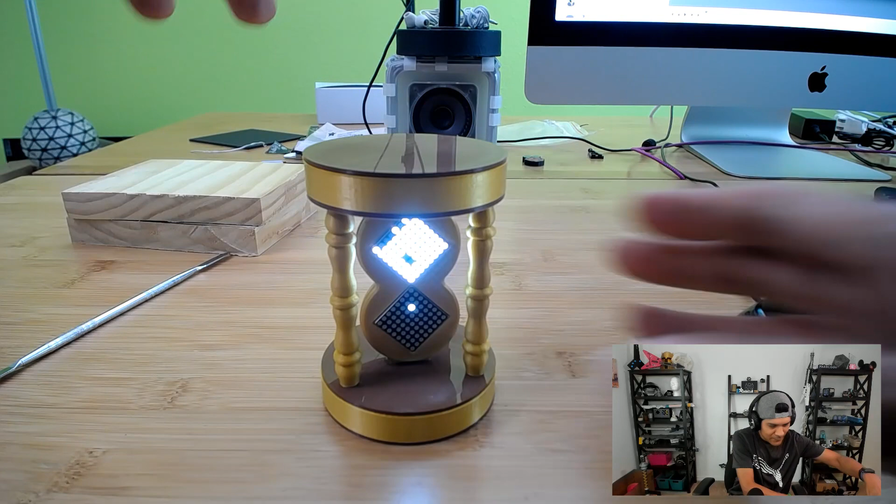In today's tutorial, we're going to take a look at the LED matrix project. This is a really fun one that I put together, and in this tutorial I just wanted to cover how I put together the snap fits. So this features a top and a bottom case, and they're very similar, and they have snap fits.

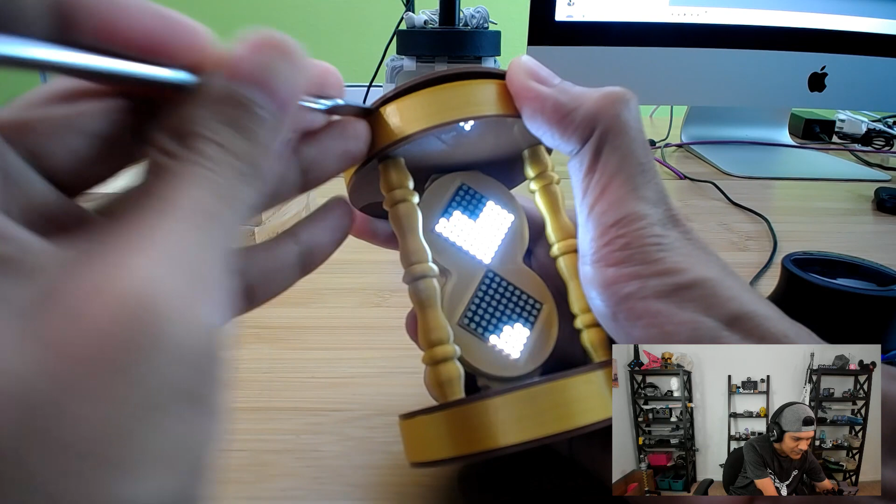So what I'll do is I'll use my spudger tool to pry this open so you guys can take a look inside of it. I usually use my fingernails, but they're a little short this week, so I used that spudger tool, I popped it open, and let's take a look at the top cover.

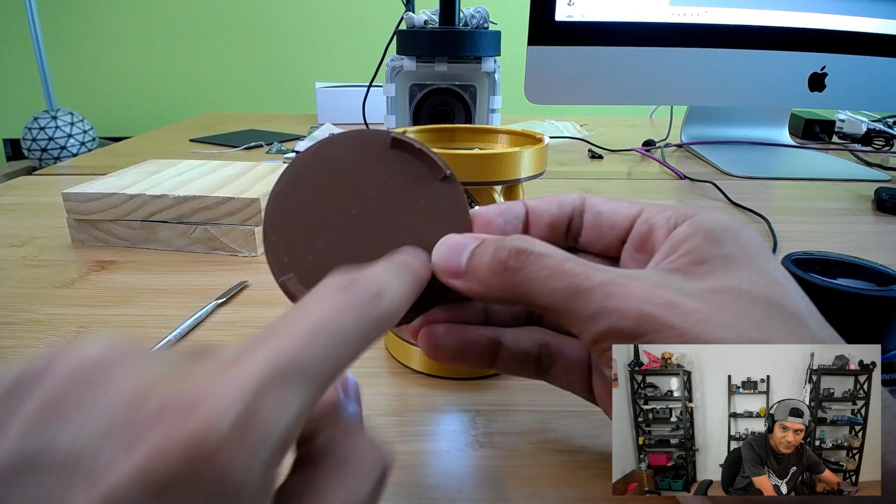The top cover features these two snaps here. They are circular, and they kind of have that little Pac-Man looking shape to them. And on the inside here, you can see that the frame is fairly simple. Let's go ahead and pop this out as well.

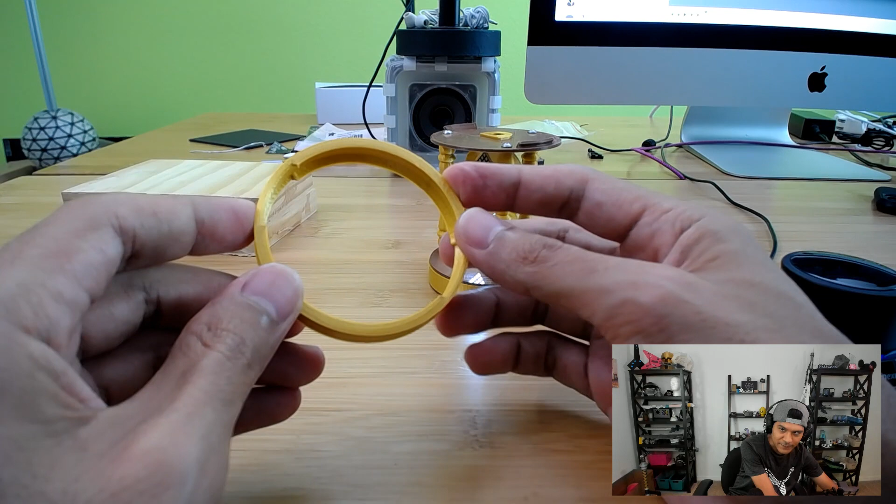So this is a symmetrical design. It has nubs here on this surface, and then nubs on the opposite surface, and they're just mirrored from top to bottom, and then also mirrored from the left to the right.

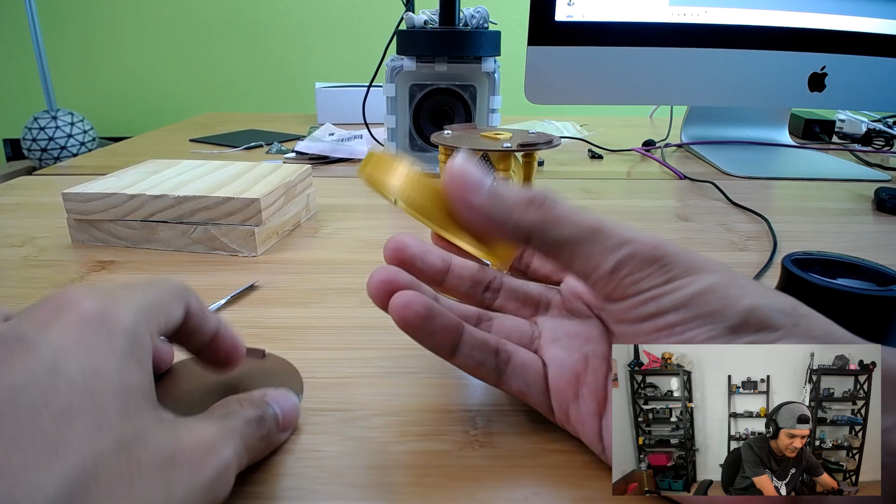There's some extra sweep geometry here. This is what actually keeps the covers and the snaps fixed in place.

Normally, if you were to create a snap fit circular case and not have these sort of end stops, then what you'll have is this thing that can kind of unlock itself by twisting it, and then it would open. That could be interesting if you want that feature, but in this case, I did not want that feature. So you can see here on the inside, this sweep keeps that snap with those edges locked in place, so it cannot freely spin now in there.

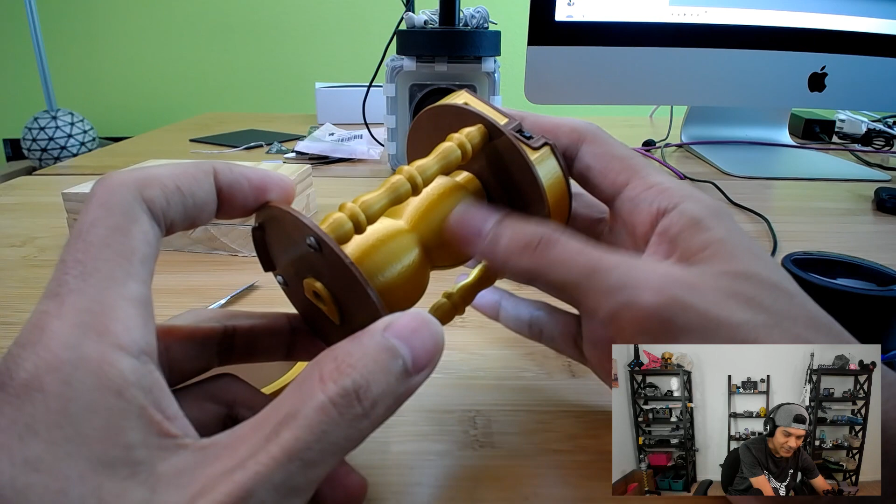And then the bottom cover for this case has some holes here for securing the spindles to the cover, and then it has this sort of registration key here for this peanut-shaped enclosure for the matrices. So that's how that's working.

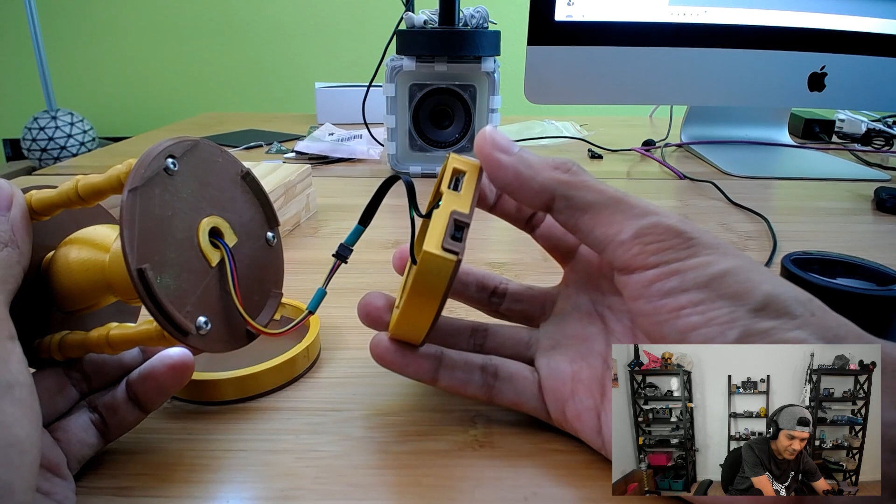And then on the inside here, a very similar type of feature, just a little bit different. This case has like a flat edge that allows the USB port to have a hole there, and a little holder for the slide switch. So that's how that's working.

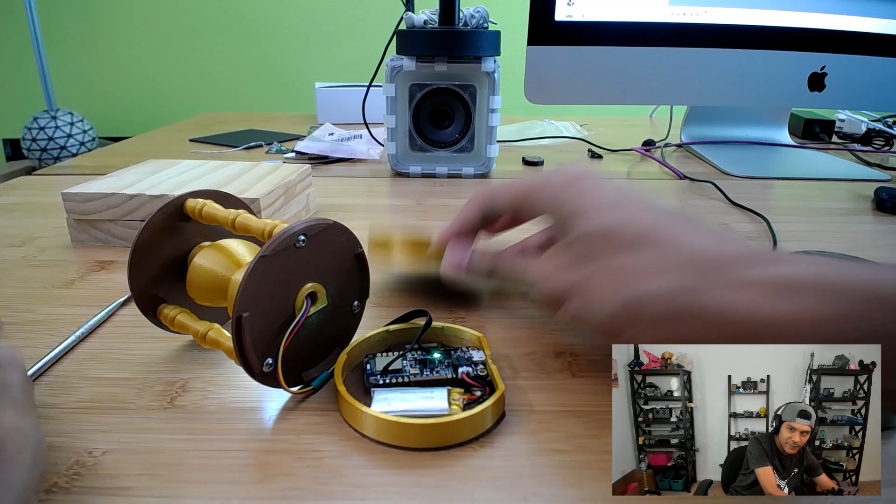All right, so we're just going to create this really simple case here, and show you guys how I create the sweeps there.

All right, so let's jump into Fusion 360 and create a new document real quick.

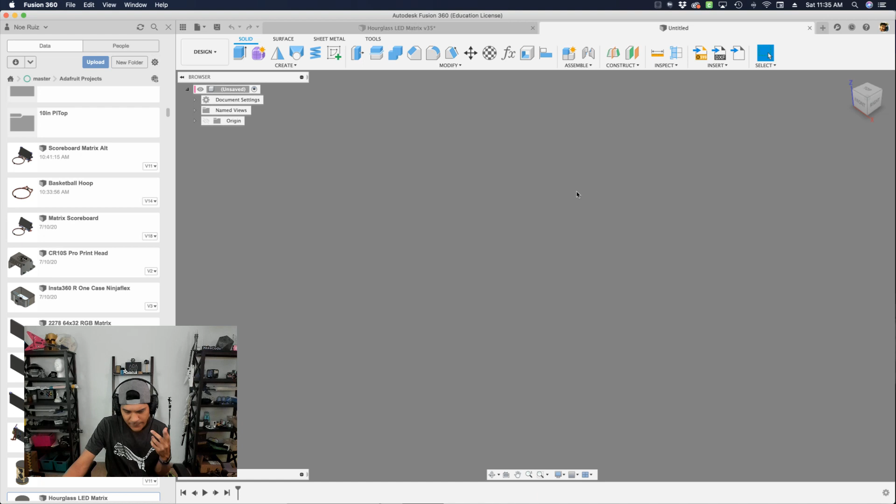All right, so the first thing I like to do is just create a new component. You can do that several different ways, you can even do it in the shortcuts window, you just say new, and new component shows up. The first thing I'll call it is enclosure, it will house all of the stuff that pertains to the enclosure. I have a hotkey set up for that, for the new component, so I'll just type that in. It's the letter N on my keyboard, but I set that one up customly.

All right, so we're going to name this one the bottom cover. Okay, I'll make a new component, I'll name this one case. I'm going to be careful here, see where it says parent - if I hit OK, it's going to make it inside the bottom cover, but I don't want that. I want it to make it inside the enclosure.

So I'll hit X on that, and then this is selected, and I'll select the enclosure as the parent. I'll hit OK, so that way it stays within that enclosure. I'll create another one, and this one will be the top cover. And then again, I'll deselect the parent and then select the enclosure as the parent and hit OK.

All right, so that's cool. Now I got my three things set up here, and I can start working away with the user parameters. Let's open up our user parameter window and start typing in some stuff. I'm going to have a thickness, of course. I like to make mine 1.5 millimeters. I like to have a gap, which is the clearance between surfaces that are going to be touching. That is normally 0.2, but we can adjust that later.

Let's go ahead and create a case diameter. Let's make this 60 for now. Again, we can change that later. Let's have the case height as well. Let's make this 15 millimeters. Why not? We can change it later. So I got the case height, the diameter, a gap, and a thickness.

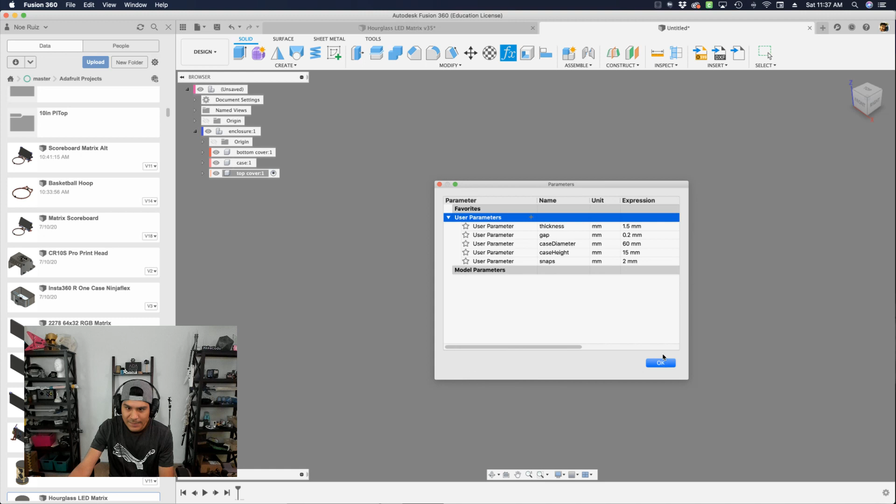One last one is the snaps, and I want my snaps to be 2 millimeters in length, or maybe it's tallness. We'll change it if we need to. So those are the standard parameters that I like to create before designing, because I tend to use those over and over again. All right, I'm gonna create the first sketch in my bottom cover.

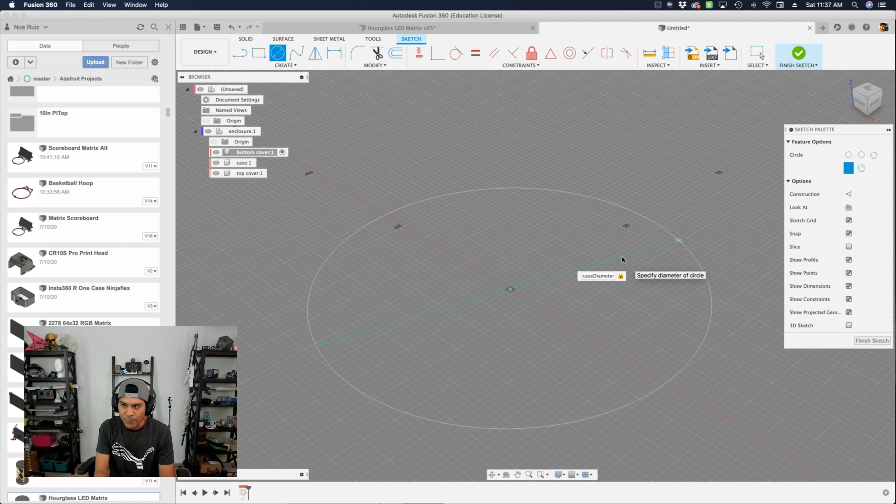So let me go ahead and activate that, create a new sketch. I'm gonna sketch here on the bottom floor plane. This is all gonna be driven from the center origin. So let's start from the center and then draw it outwards. Go ahead and type in our case diameter word and hit enter, and there it is. I'll select that, hit E on my keyboard to extrude, and instead of putting a number, I'm gonna say that's gonna be the thickness. Hit OK.

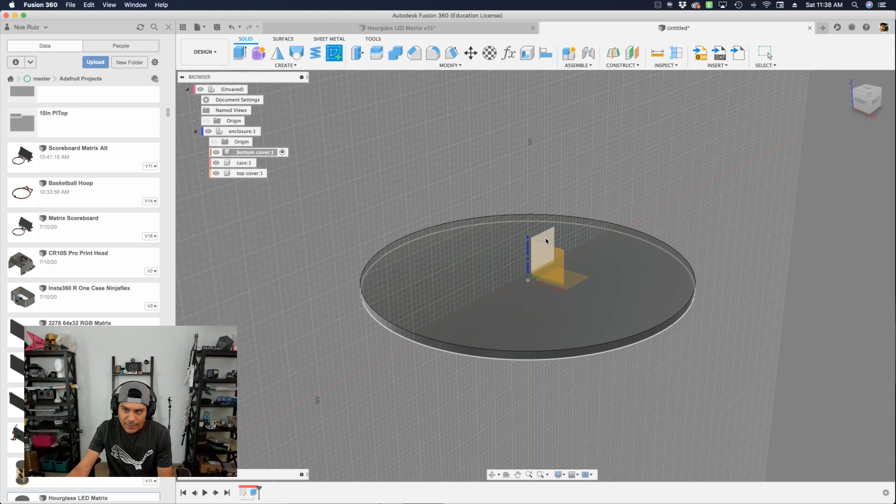That's pretty much all I need to do for this. Actually, no. Let's go ahead and start creating the snaps. I'm going to create a new sketch, and it's going to be on one of these side profiles, whichever way you'd like to. You might want to look at your view cube, like is this the front? Do I want mine to be in the back? I'm going to make it on the left and the right side, so I'll start from there.

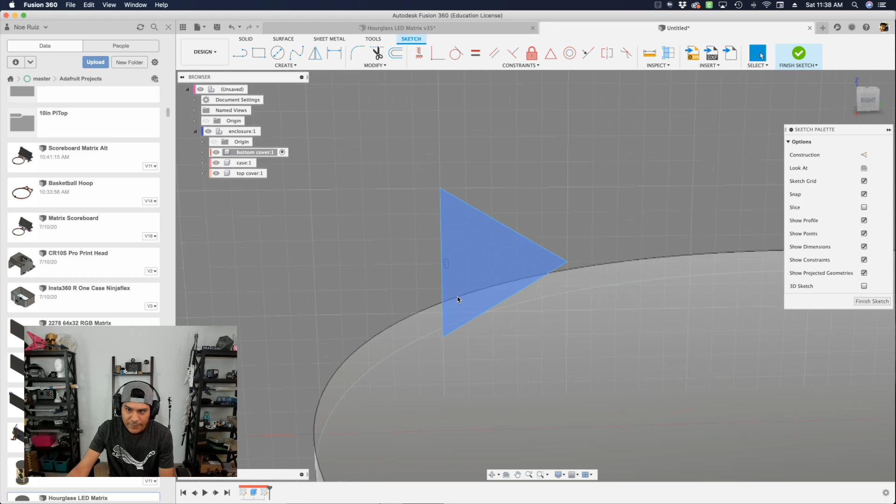Let's zoom in here and start sketching out our triangle. So let's go ahead and make a triangle. It's going to look like this. All right. And then we're going to start straightening it out. So this edge here already gave me a sketch constraint, which is horizontally and vertically constrained. And then I will create a sketch dimension, a degree, saying I want a certain degree from these two edges here. Let's round this off to 45.

And then we can select these 2 edges here and then set a perpendicular constraint to that. That way it is a nice 90-degree thing here. The last thing I'll do here is give this line a sketch dimension value of the snaps, and that's going to be 2 millimeters because we set that up. Now I have this triangle that I can move around, which is nice.

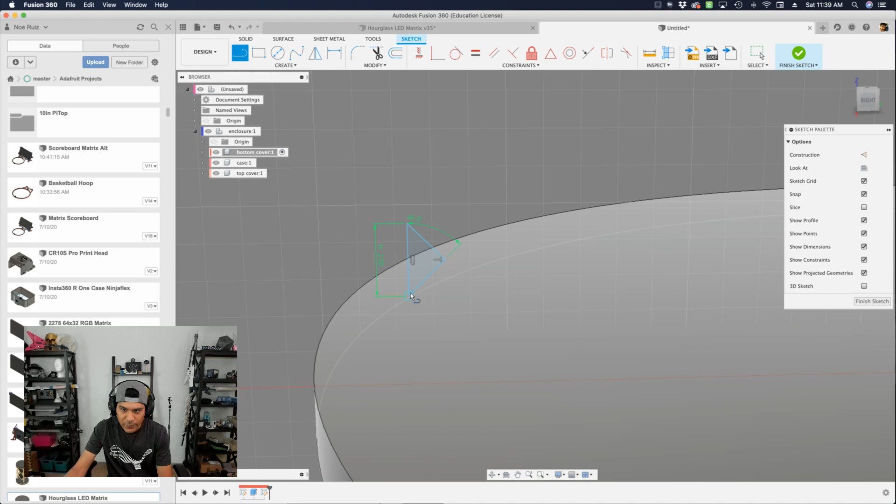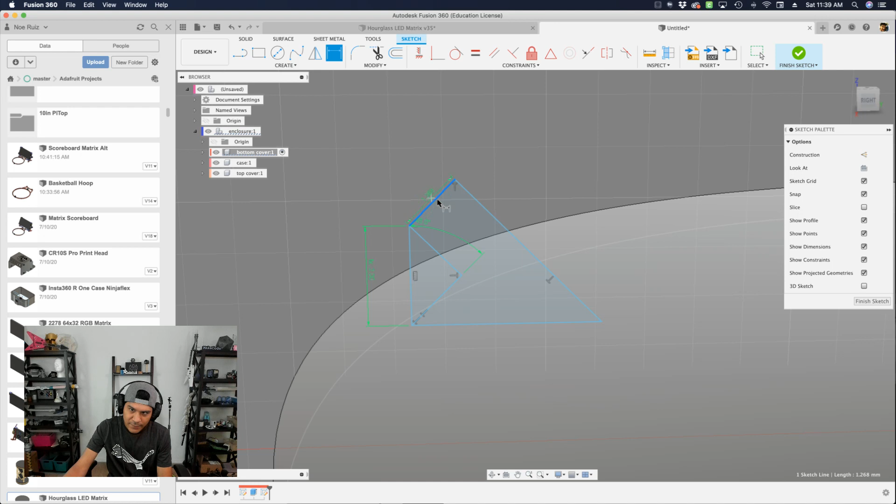Now to create the rest of the shapes, it's going to look like this. We're going to make a straight line that goes across, and then a line that goes up this way, and then one that goes back down connecting to one of these points here. So to straighten this out, I'll select these 2 lines and create a perpendicular constraint there. And then all I need to do here is give this edge here, this line, a value of the thickness, and that's 1.5.

Okay. So from here, now we can kind of move this whole set of lines that creates our snap fit shape. And I need to start adding some sketch dimensions to it. So starting from the center, I'll create a sketch dimension, hit D on my keyboard, and then select this bottom line here. And I just need this 2.5. I need to change that to the thickness. And hit OK. So now if we look at it straight on, you'll see there it is right there on that thickness.

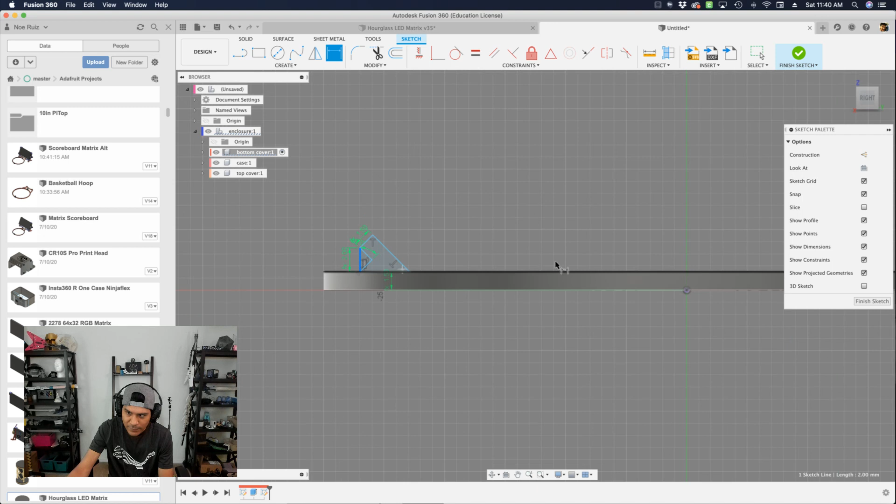And then what we can do is you can grab this line and say, I want this line to be a certain distance away from the center. And this is going to be our radius of our diameter. So we'll take our diameter, divide that by 2, and then we need to subtract the thickness from that.

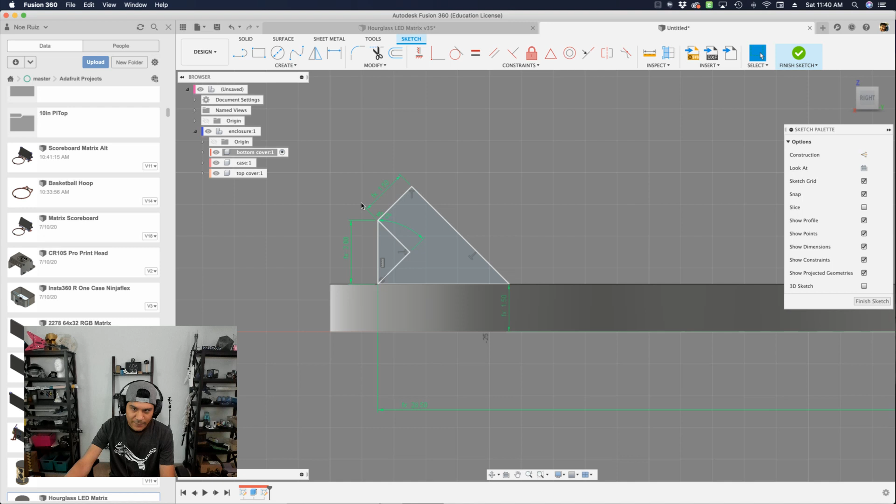And we're doing that because when I create the case, I'm going to make an offset that will create the wall. So that's why I have this little bit of extra gap here. So I'm subtracting the thickness, the wall thickness really, from that. So now that that is set up, I can now hit Finish Sketch.

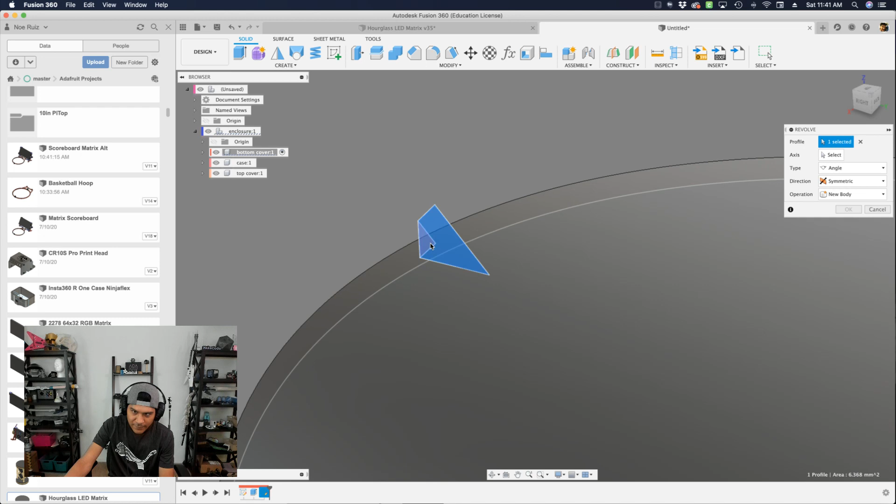And the way we're going to curve this around is with the Revolve tool. So I'm going to hit Revolve, and our profile will be just this thing here. Not the inside, but just this shape here. The axis will be our blue line here, which is the Z-axis. And I will change the direction from one-sided to symmetric.

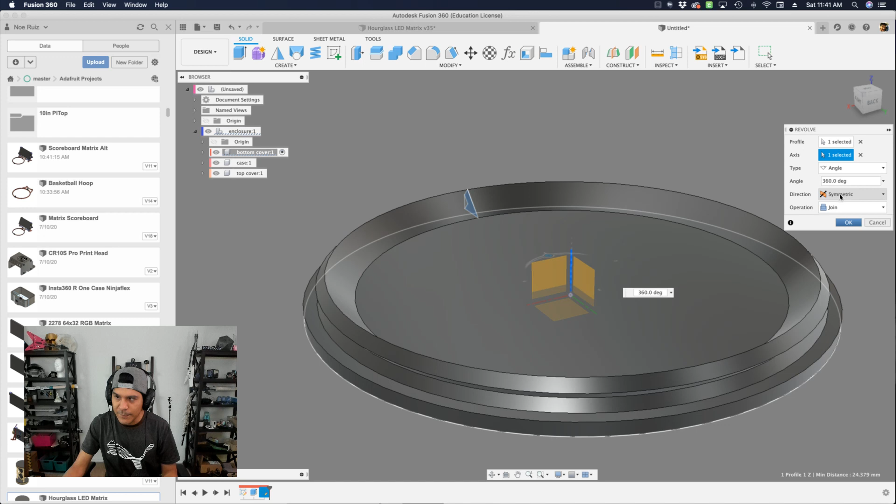And normally this would be like 360 degrees, which is going all the way around. You could do that for your case if you'd like, but you would have a free spinning top cover, or at least it would be able to be free spinning. You might not want that, so in this case I'm making it 30 degrees.

And again, I have that direction set to symmetric, because if it was one-sided, it's only going to go one side, which makes sense. The operation is set to join, so that it merges with that body. Hit OK. All right, so that is our first snap bit. And what I'll do is I kind of want this one to be mirrored to this side.

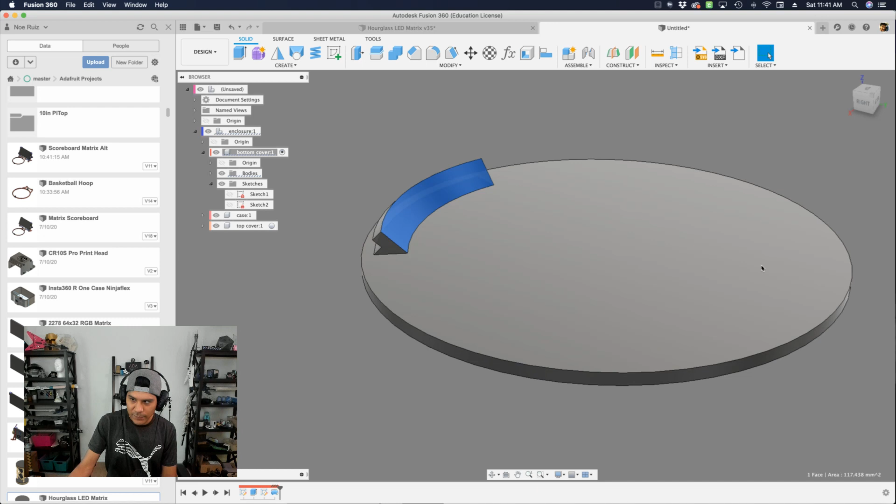So we'll just bring up our mirror command and change the pattern type to features and select our revolve from the timeline. Our mirror plane will be the plane that makes sense. In this case, it's this one right here. You get a little preview there before you hit OK. Hit OK, and there is our bottom. All right, that's our first thing.

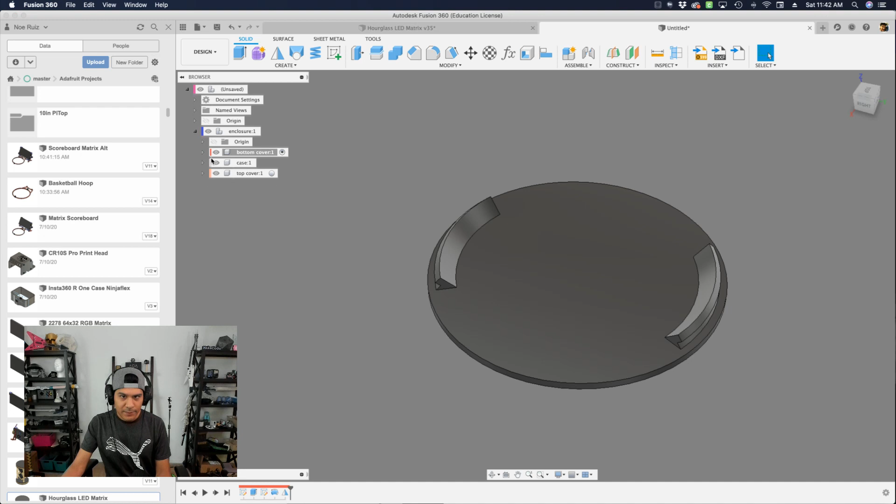Let's go ahead and create our case. So activate that component. And what I'll do is I'll create an offset plane starting from the bottom here, and then going up. Instead of a number, I'll just type in thickness, because that's the value that we want, is to be our thickness. I'll select that construction plane and start sketching right on there.

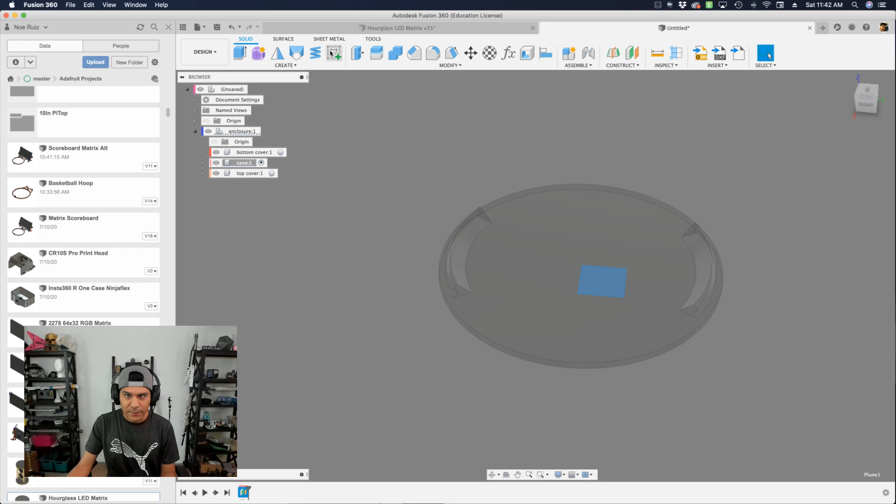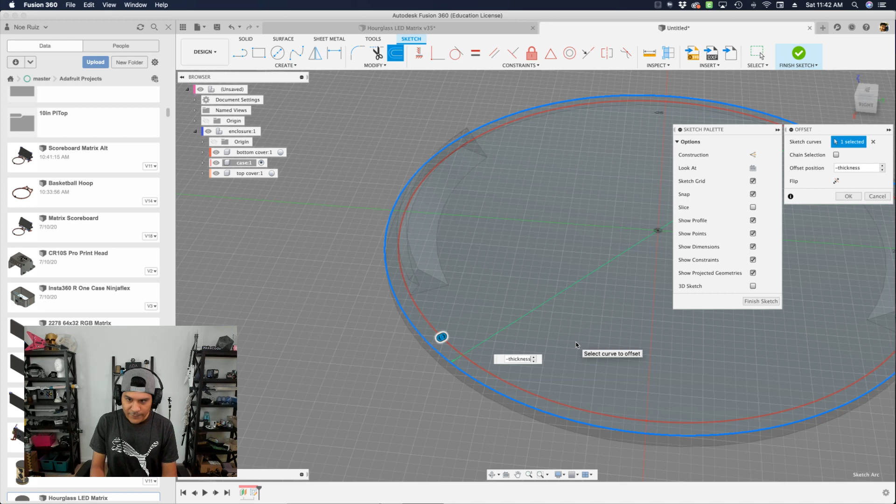Again, from the center, we'll create our circle. Let's call this the diameter. And then what I'll do is select that circle and then hit O for offset. And I want the offset to go inward, so that is a negative value. And I want it to be the thickness, of course, so I can say negative thickness, and that will give me that 1.5 millimeter value, and hit OK. All right, so now I'll finish sketch.

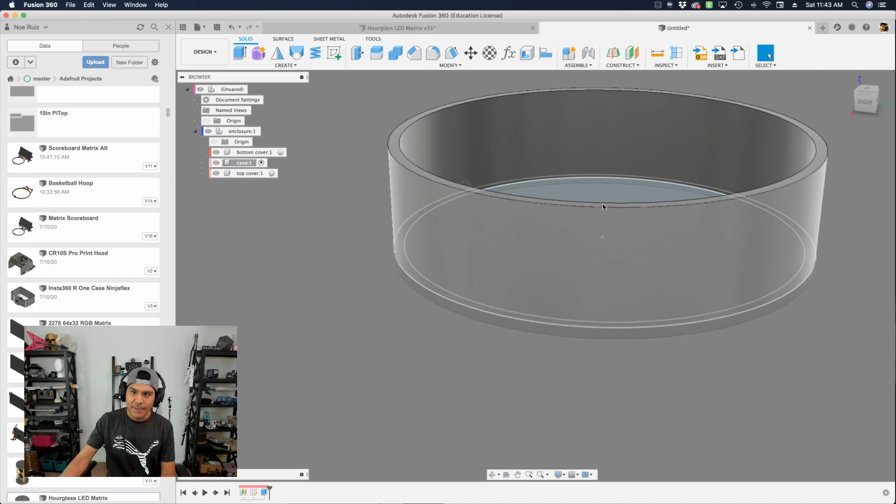I'll select just that sliver of our wall thickness, and I'll hit extrude. I'll start to bring this up, but instead of using a real fixed number, I'll go ahead and type in height, because we did set that up already. So the height is set to 15 millimeters, and OK. I can hide the sketch for a second there just to kind of get a look at it.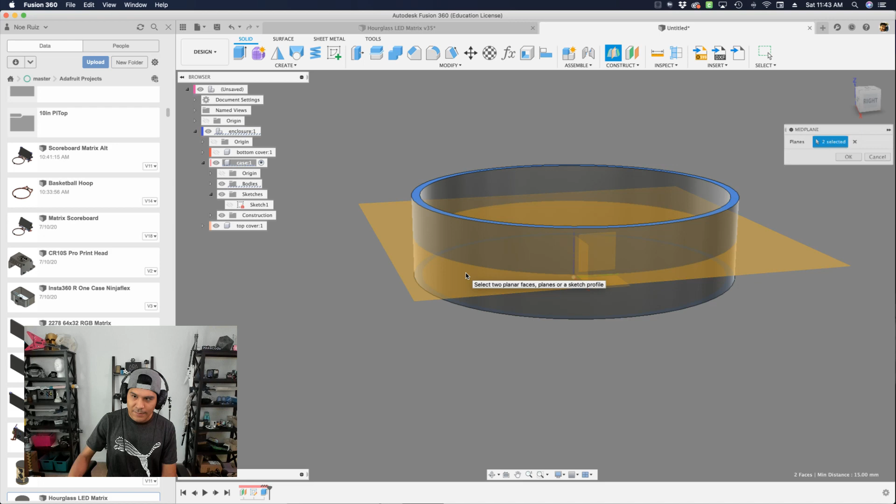All right, the next thing I'll do is I'll use the mid plane tool to create a mid plane between the top surface of our case, let me hide the bottom cover, and the bottom surface of our case. And Fusion will just figure out what the center of that is. So there it is, and it'll always update whenever we update our height value, our user parameter. Sweet, and that'll help us create a mirror in a few moments as well.

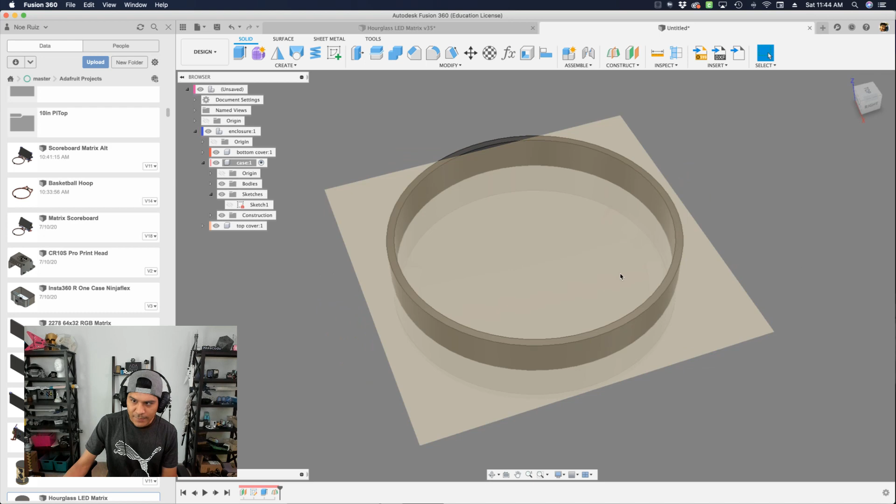So with the case selected, we need to create our nubs, and the nubs should have the same orientation of our snaps there that we created. Let me just go ahead and hide that real quick. And so that means we're going to create it on this plane, and then we can come in here and start to create our triangle shape. So let me hide the bodies for a second. The triangle shape is going to be inward, so we'll have a straight line, and the point will come out this way and then connect back again.

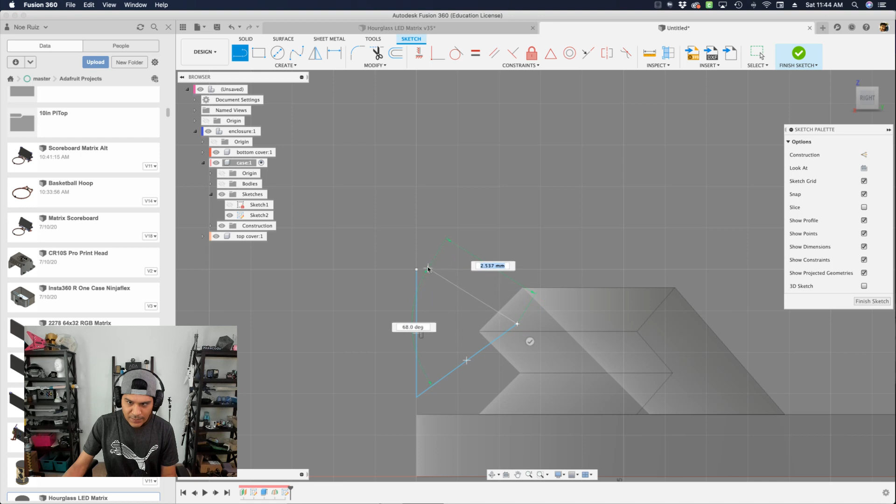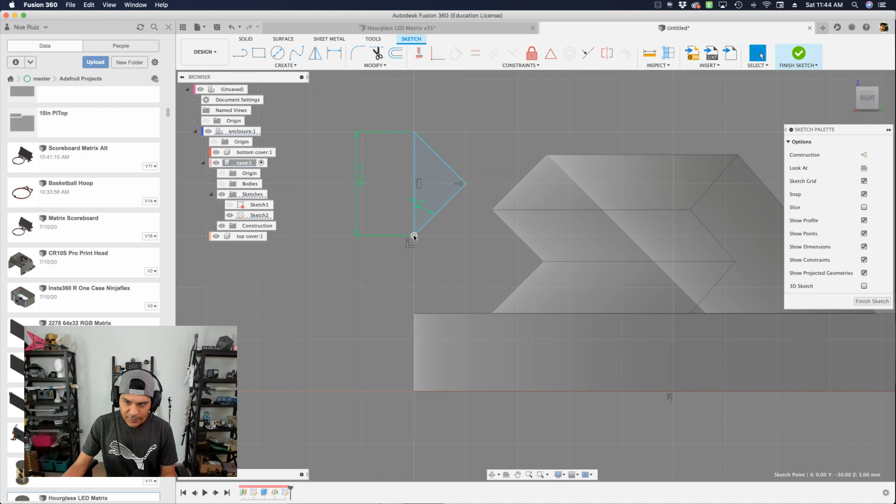All right, so we already have our vertically set constraint there, so I'll just apply a dimension here for snaps. I'll create our degrees here, which need to be 45, and then I'll grab these two lines and make them perpendicular. Cool. Next thing is let's grab this vertice here, and I say I want a certain distance away from the center right here, going up and down.

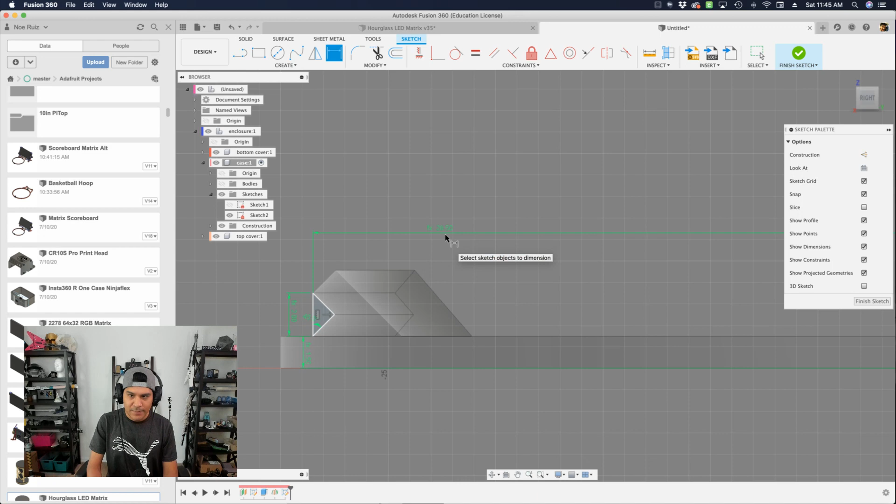Let's make this the thickness. And then this line needs to be a certain distance away from the center again. This will be our diameter divided by 2 minus the thickness. And that sets it right in there where it needs to be. We'll add the gap a little bit later. So with that there, let me bring back my body and hide our bottom cover. Look on the inside there.

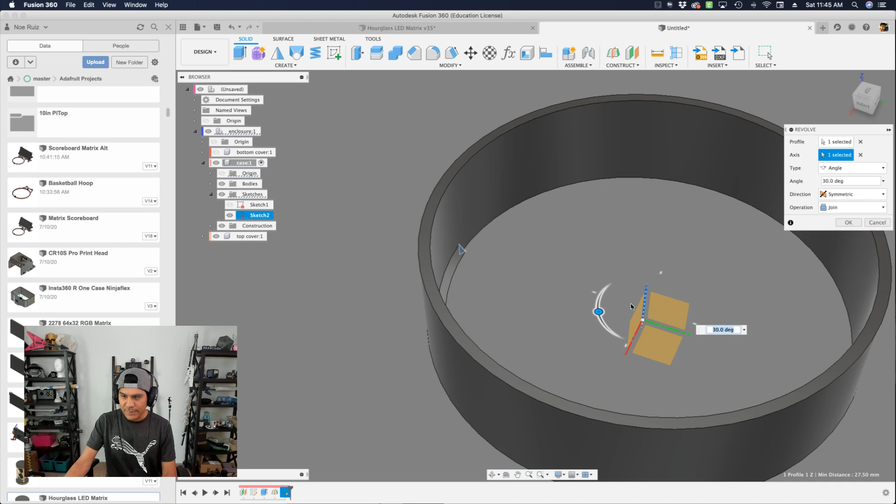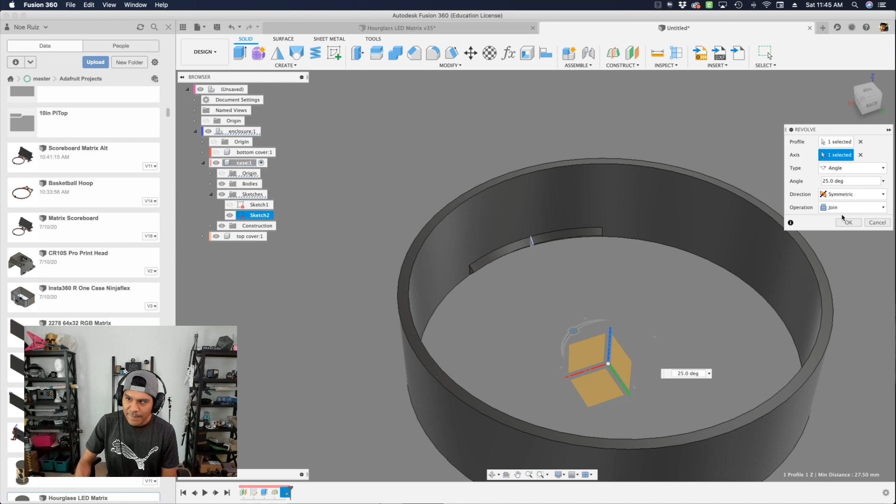We're going to use the same thing, a revolve, and we'll revolve that profile on this axis, which is our blue line. And then I'll change the, there's a little bit of a bug here. It's the direction set to symmetric, but it's not showing me that. So I'm going to switch it back to one-sided and then switch it back to symmetric. And then Fusion remembers that that is what it should do. All right. Our degree should be about the same. So let me set that to 25 and operation set to join.

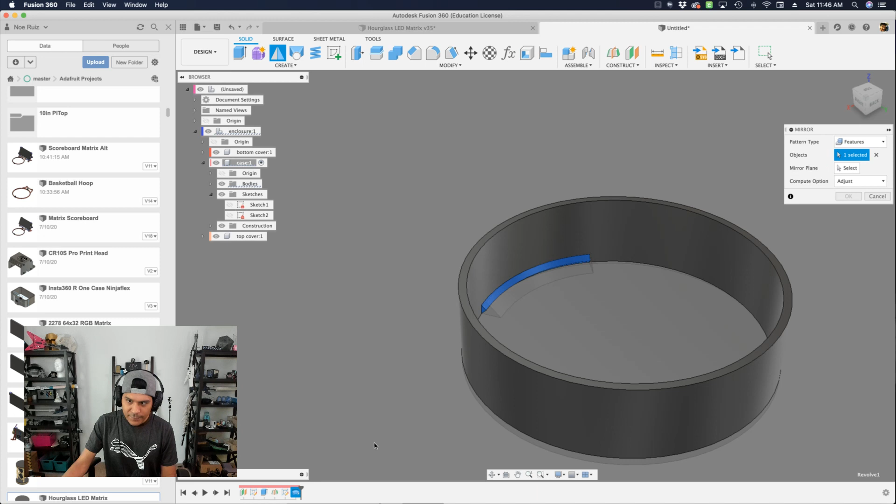So I'll hit OK. With that there, I could bring back the bottom cover just to get a look at it and see that, yeah, that looks like it is indeed the same degree. Cool. The next thing is to create a mirror. So I'll hit mirror, and I'll mirror that revolve. And then our mirror plane will be this construction plane there that got made. That's sort of built into the component. All right, so hit OK. And then we have those two nubs in there. Let me hide the bottom cover so I can see. And there we go. There is one over there and one over here.

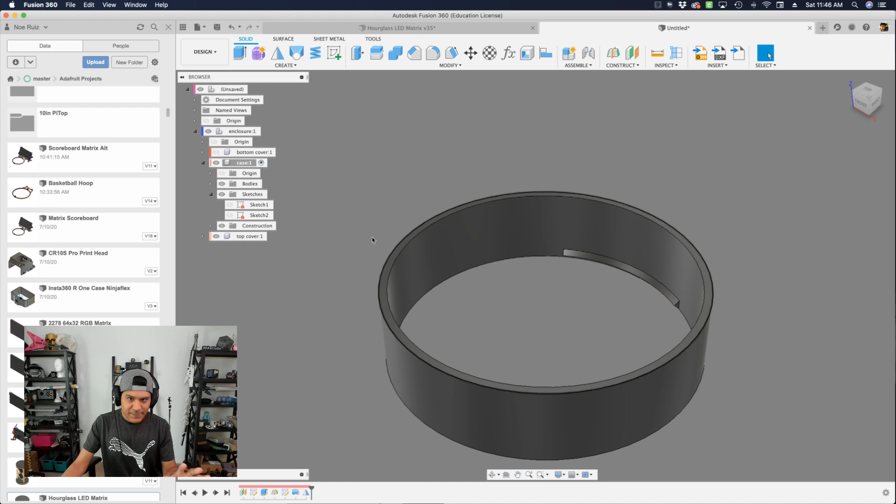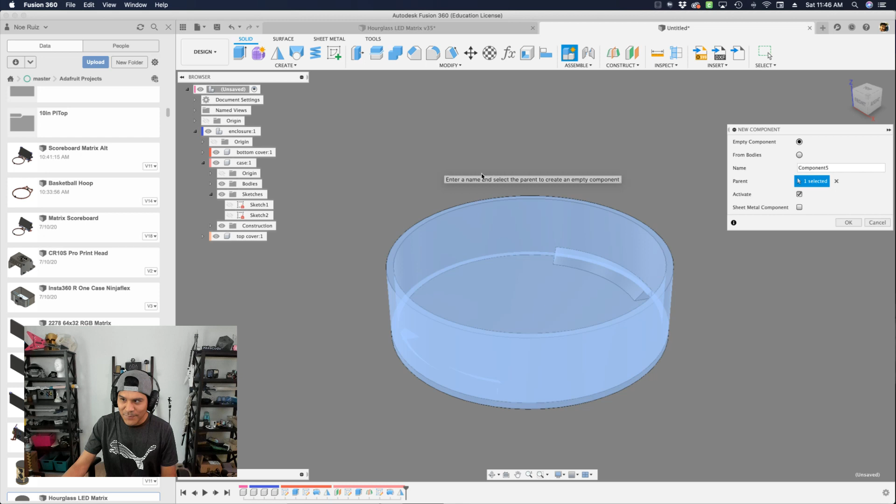Excellent. Now the next thing we need to create is the geometry that's going to stop the cover from twisting open. So let me start doing some things here. I think I could just do S key to bring up the shortcuts and just say color cycling toggle. I'm going to turn that on. And sometimes it gives you decent colors. This time it didn't. I don't like the colors. So I'm going to turn that off and bring up my appearance window and then just assign some colors to these things because they just help me visualize it a little bit better. You can even edit the color to bring it up so you can see a little bit more of the detail. And that way I can kind of get in there.

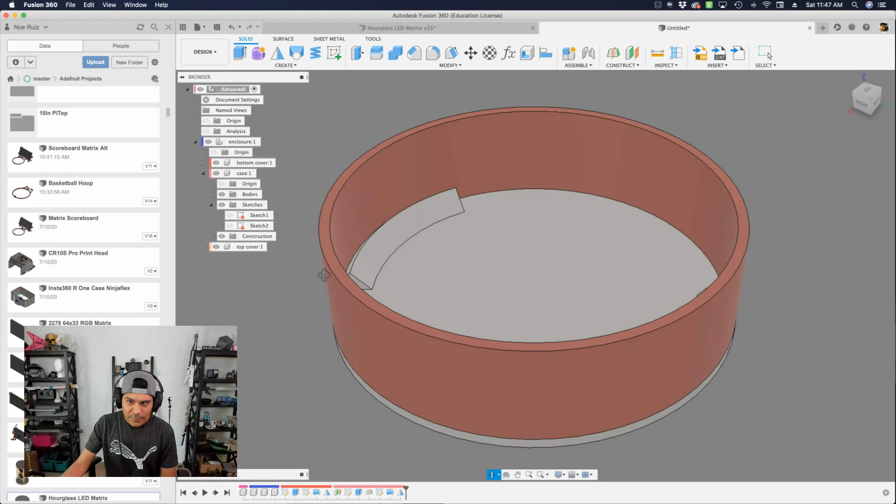Another thing I'll do is I'll use the section analysis to get a sliced view of the half mark there, so I can see the inside of our mating surfaces there. So that's cool. All right, the next thing you need to do is create that geometry that's going to stop this guy from twisting open. So if I were to actually print this out, and you can see here that as I twist it open, this could be something that you want as a feature, but it's hard to tell whether inside the case it twisted open or not.

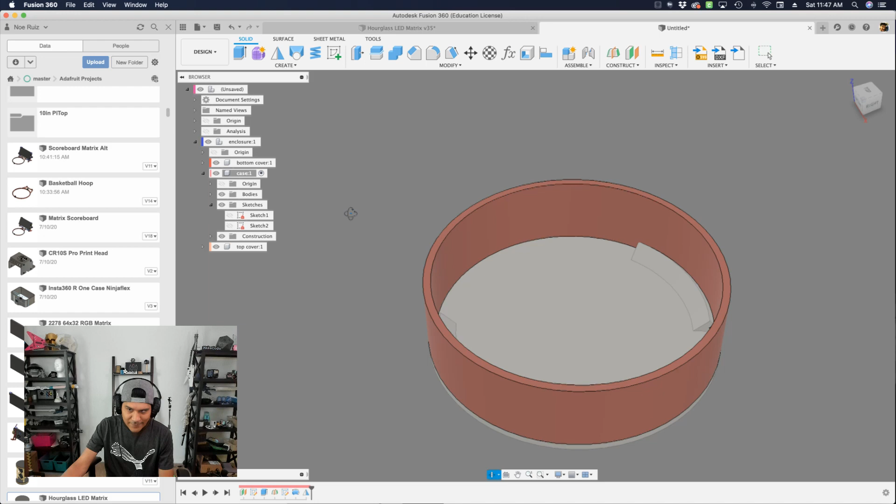So if you want to do that, you can, but in this case I want to have it not twist open. So I will create some new sketches just to create sort of a geometry that's going to stop that from happening. So I'm going to draw it and make sure that I'm in the right component, which is case. That's where it's going to go. I'll create a new sketch, and it's going to be on the opposite end here. So looking at this surface here, that's going to be on the front and the back.

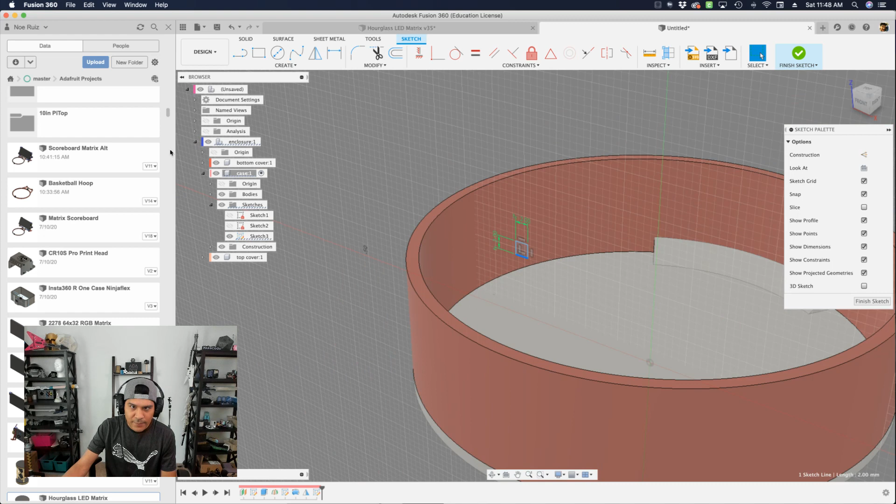So here, all it's going to be is a rectangle with the snaps value. So that's going to be 2 by 2 millimeters. And then I just need to assign some sketch dimensions to it. So I can say for this surface to the bottom here is going to be the thickness. And then from this line to the center will be our diameter divided by 2 minus the thickness. And there is that. Hit finish sketch.

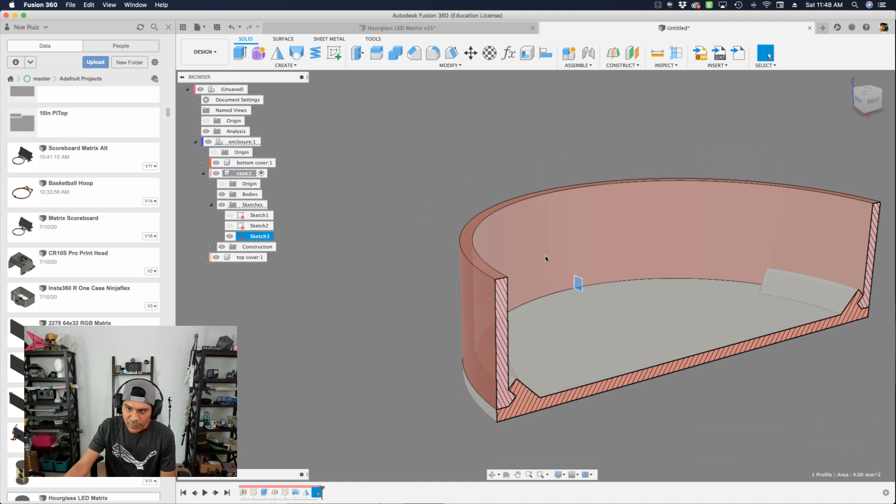Now that that is placed where we want it to be and drawn, I can create a sweep. We're using a sweep because we don't actually want to revolve around the thing. We just want to sweep along a certain edge here. So hit sweep. And then what we'll do is we'll hide the bottom cover and hide the analysis for a second. And the path is going to be this line here.

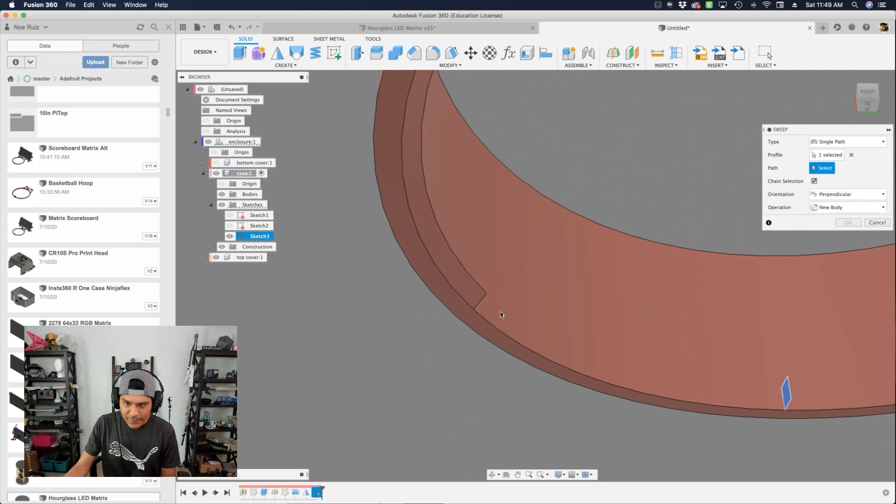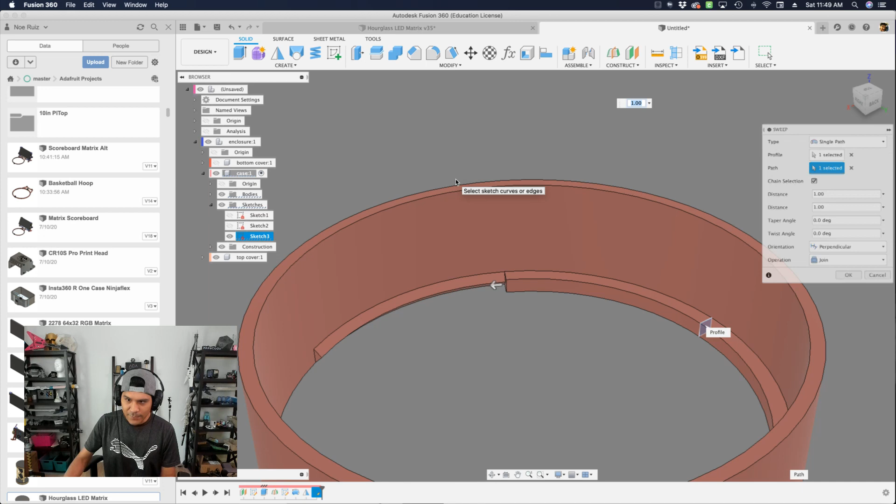Now you see if I roll over it, the path is only the line that starts from this edge to the other edge there. So that is about all I want to do, is to select it, and you get a nice preview of it. You can see what it's doing here. It's just creating some geometry that will stop our snap fit piece from actually coming off and twisting out. So that's why we're adding this. So I'll hit OK.

Now this is added, I just need to mirror that to the other side. That's simple enough. We'll bring up the mirror command and the pattern type set to feature. I'll select that sweep from the timeline, and then our mirror plane will be the one that makes sense here, this one here. Hit OK. And there, that looks good.

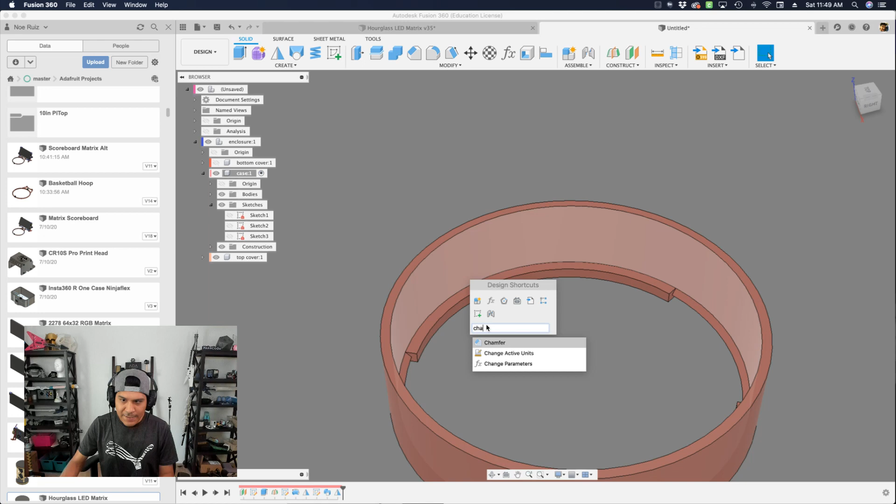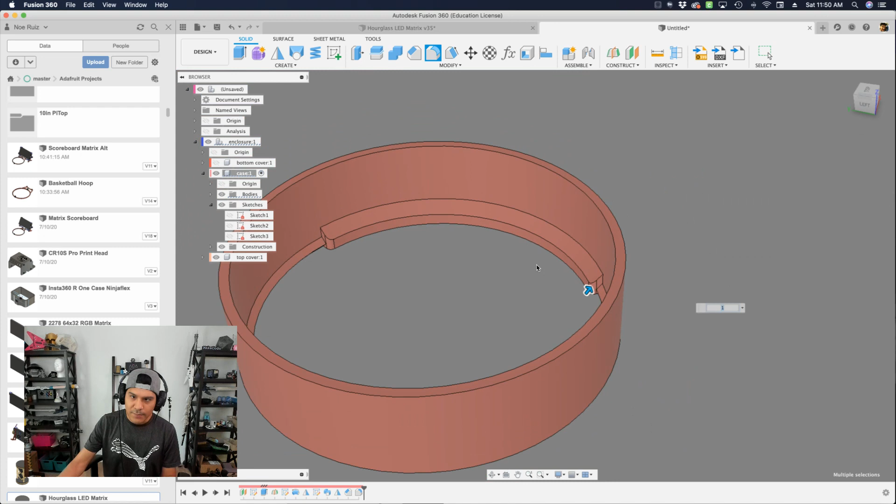Now there's some other things that we can do. I can add a chamfer to this edge here. Let's make it 2 millimeters, rotate around, select the same edge on the opposite end, hit OK on that. That looks good. Another thing I could do is add some fillets to these edges so they're not so rough and pointy. So I'll select those two there, rotate around and select the other two, giving me a total of 4 edges. There we go, hit OK. So that is really nice there.

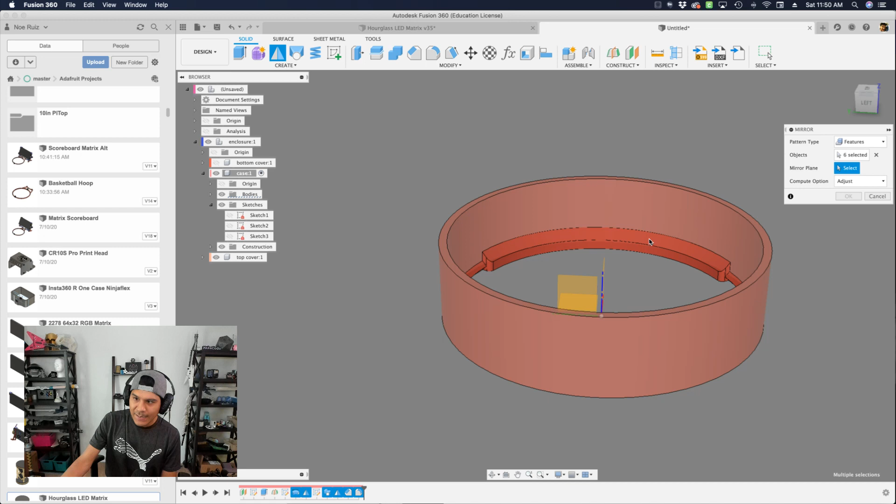Cool. I need to mirror this whole set of stuff to the top because we're going to have a top and a bottom. So it's really this one, these, all of that right there, starting with the revolve all the way down to the fillet. With all those selected in my timeline, I can just say mirror. And then Fusion says, oh, there are 6 selected. My mirror plane will be none of these guys because these are default.

Remember that one that we created that was the midpoint? Well, we're going to use that one, which is right here. So select that, hit OK, and there it is. Let me go ahead and hide that construction plane since we are done with it. So now we have a mirrored thing.

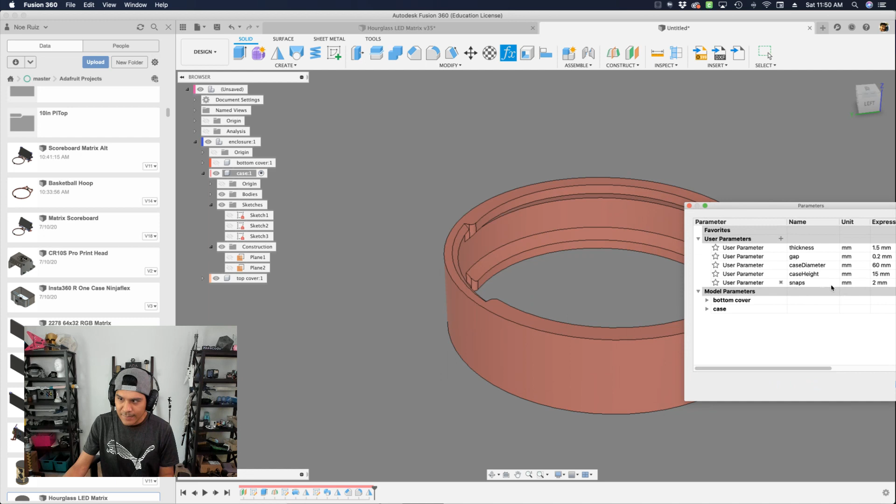And what's really nice is if we wanted to change the height, make it a little bit taller, say 20 millimeters, it's going to change perfectly with us. Let's drop it down to 10, make it even smaller, and that looks okay. Let's bring back the bottom cover and take a look at that. That looks okay.

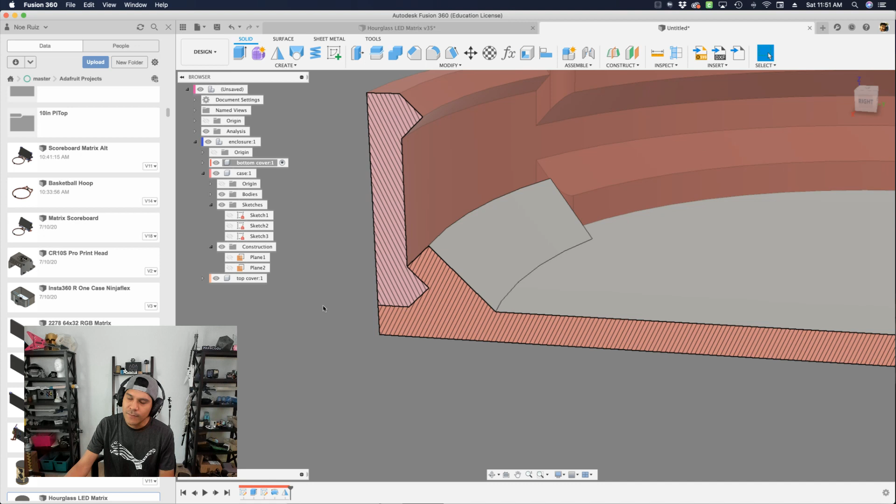Now that we've kind of created this, let me go back into the bottom cover and start applying those offsets. So I need to create some offsets to give us some gap, because if we look at our section analysis, you can see that there's no gap. And if we printed this out, it'd be way too tight. It probably wouldn't fit. So what we'll do is we'll create a press pull of these surfaces, this one and this one. We want to bring these inward. And instead of having a fixed value, I'm just going to type in gap because we already set that up in our user parameters. And it's 0.2 millimeters. So hit OK on the gap.

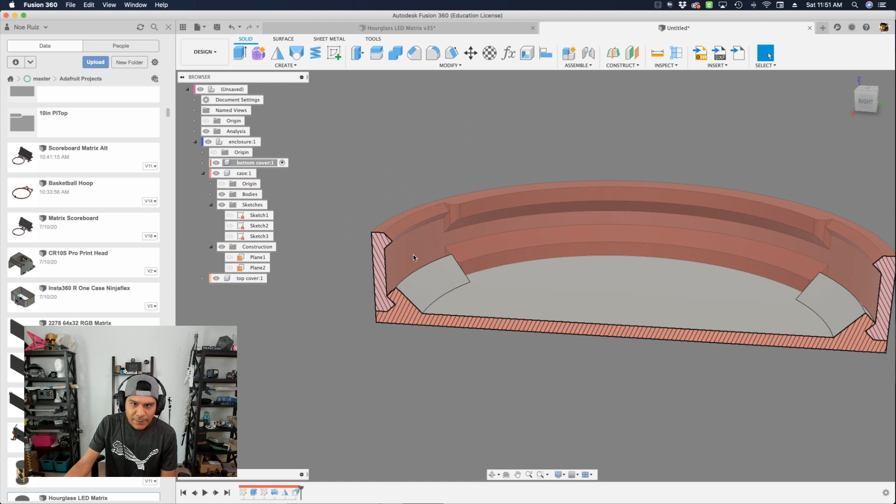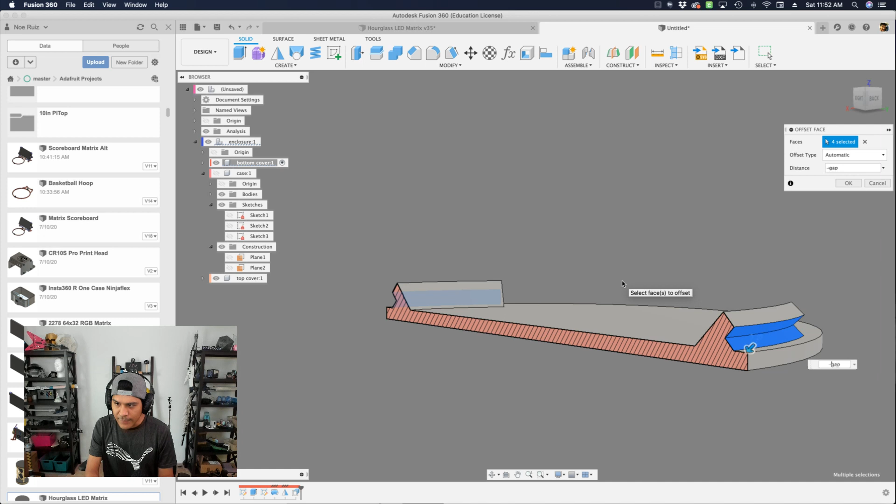And now I need to hide my case so I can get to the other surfaces. I'm going to use a press pull again, but this time on these surfaces. Let's get that one, revolve around and select the opposite ones here. All right, now instead of adding a value, I will just type in gap, but it needs to go on the inside. So I'm going to say negative gap, and that'll push it on the inside.

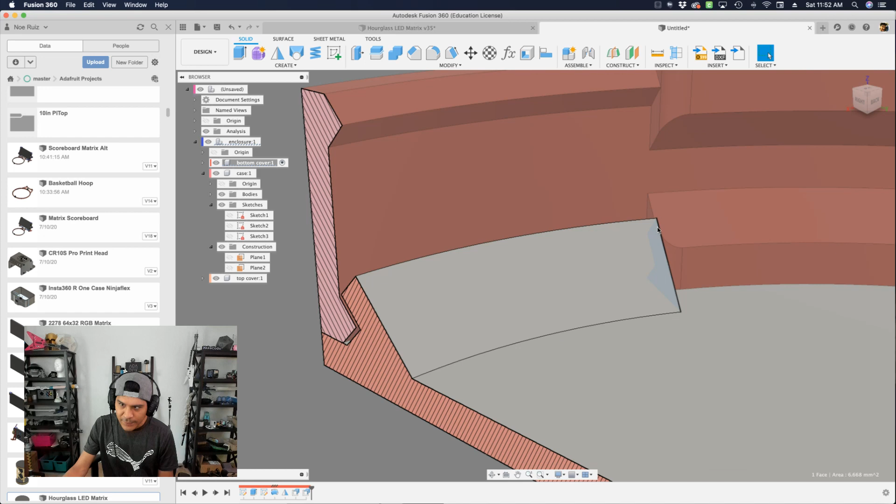Excellent. So now with that, I can bring back the case and take a look on the inside. Yeah, there's definitely a 0.2 millimeter distance between those surfaces. And that's what we want because we're 3D printing it. Another gap that you want to do is this surface right here, because you can see here that this surface and this surface over here are just touching. There's no gap between them. So let's go ahead and add that gap between them.

And turn off section analysis for a second. So again, a press and pull is just fine. I'll select this edge, surface, this other surface.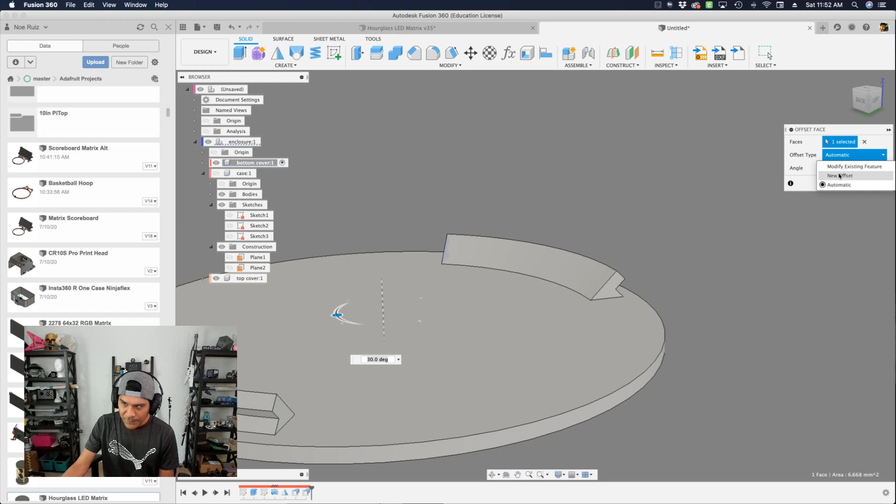Instead of automatic, sometimes that happens. I'll create new offset, and then I can select all these multiple surfaces like that. Did I call them surfaces? I meant to say faces. And negative gap, because we need them to go on the inside. So you can see here, as I hold down the command key, I can see a preview of what the effect is being done. I'll hit OK.

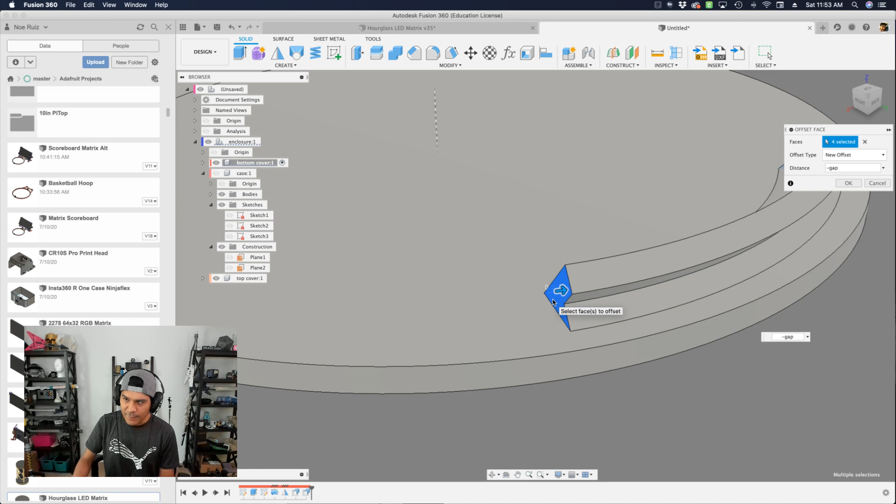Now if I bring back the case, we should have some gap all the way around. Looking at it straight from the top, we can look down into there, and yep, there is a slight gap that we want. Excellent.

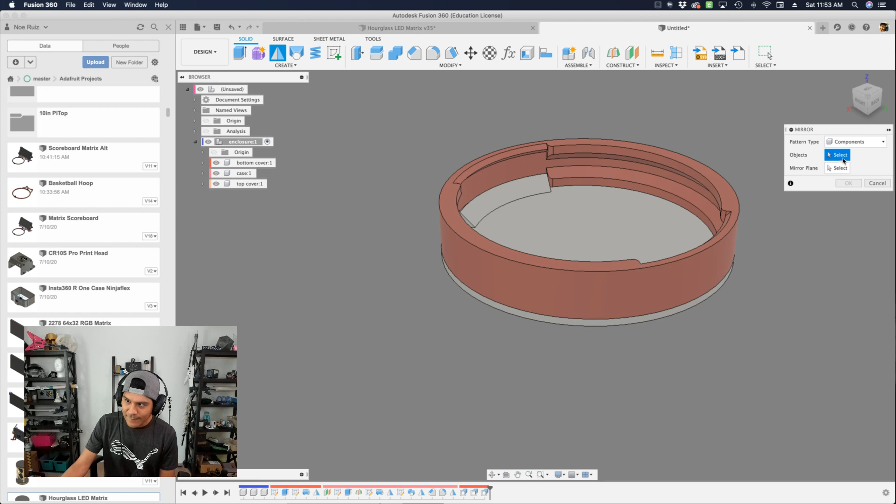Well, at this point, we could redraw the bottom cover, but if really this was to be a simple case as is, I can just mirror that entire component. So I say mirror, change the pattern type from features to components. This will be the thing that we're mirroring, is the bottom cover. And then our plane, well, it's going to have to be that midpoint

construction plane that I think is hiding inside the case. Yes, it is. So let's select that and hit OK. And then hide the construction plane again. So there it is. There's our top and our bottom.

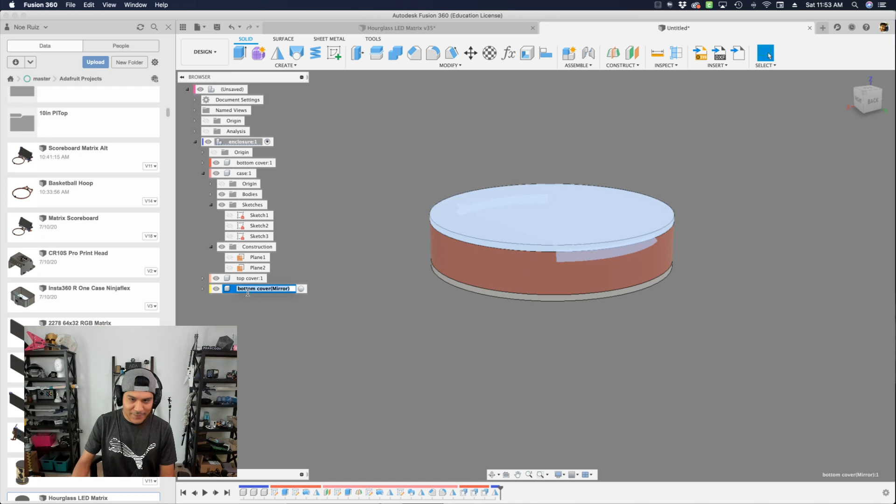We can even call it top cover mirrored, because I did create that thinking that we were going to make it, but let's go ahead and delete it and say, no, we don't need that.

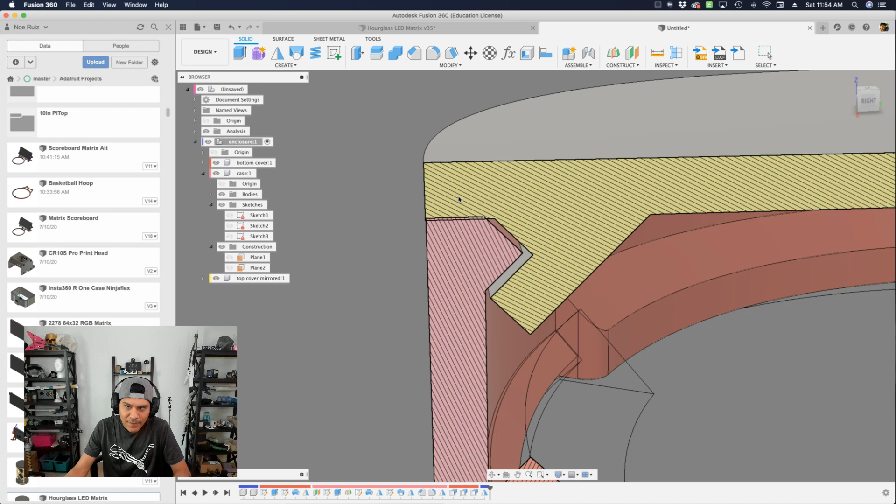That is a really short way to create it. And if we look on the section analysis, we can get a good look on the inside there and see that all our surfaces are nice. Now you might be wondering, why isn't there a gap between this top surface and this surface here? Well, because we have a gap just about on the top and bottom, you have plenty of room to kind of make this. I think if we were to add another offset to this surface, we might have too loose of a tolerance.

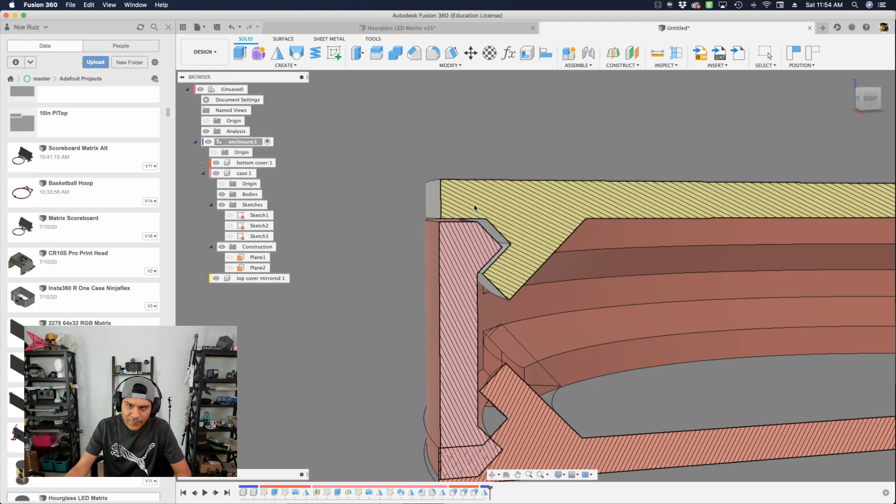So if you do want that, I guess you could do that. But for my testing and my projects, I tend to make these, they tend to work out just fine like that.

A bit weird on what happened here. There we go. Okay, it was just the way that everything got moved. So not a problem there.

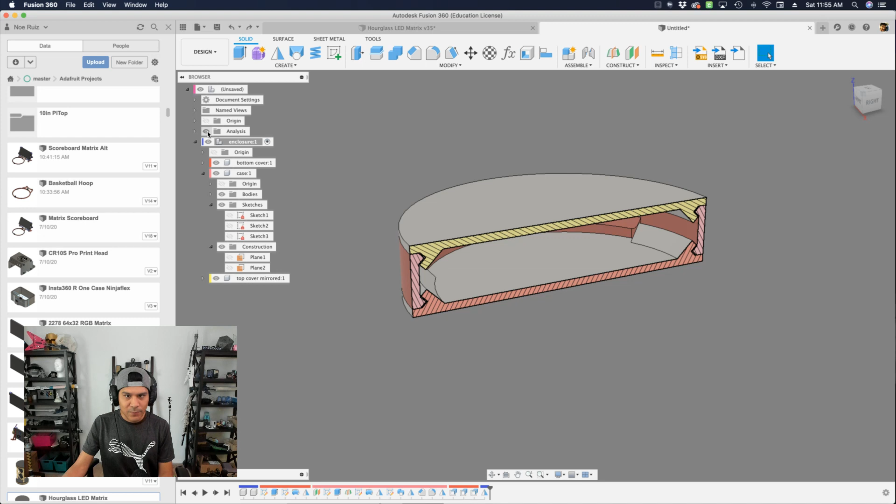All right, well, that is a really quick way to create these snap fit geometries for a circular case. Now, what's really cool about this is, of course, we can change the height, change the diameter, do all that stuff, and it will just blend with it. It'll just adapt and grow with it.

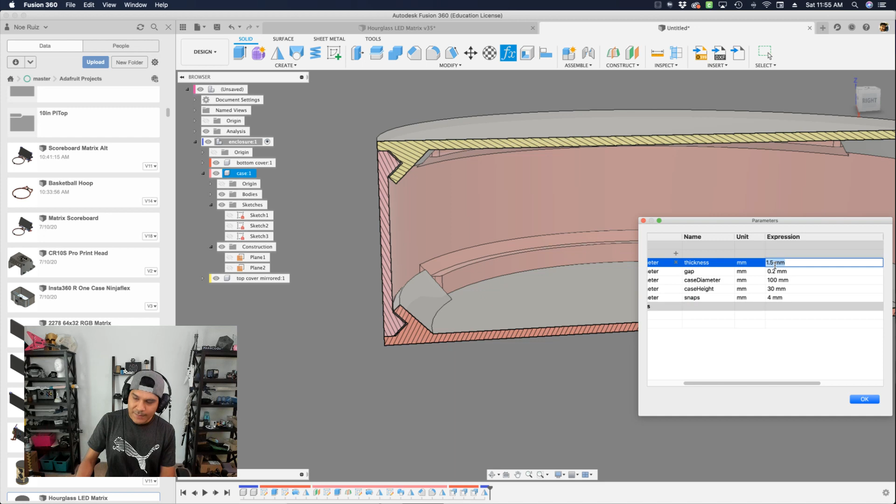If we wanted to change the size of our snaps, we can do that as well. Let's increase that 2 to a 4. That way we have these really chunky snaps. If we want it to be a little bit thicker, maybe 3 millimeters, we can do that as well. And that is making really chunky and nice.

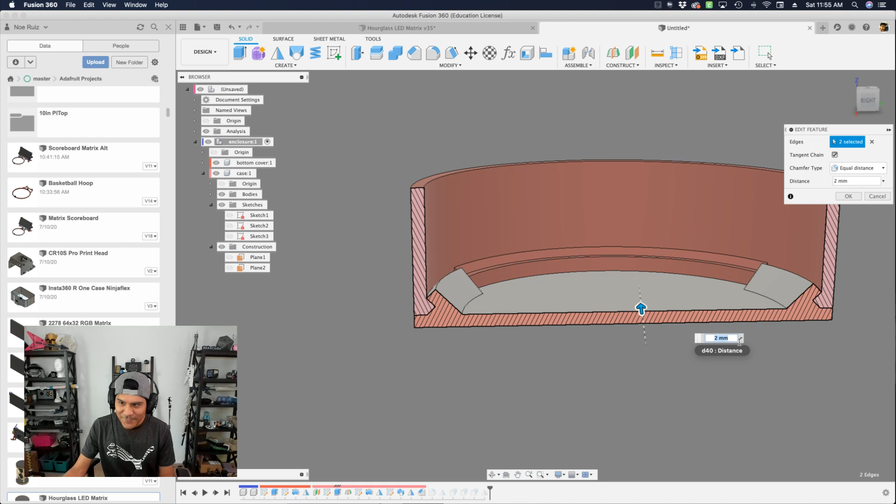Now you might want to adjust your chamfers and your fillets there. That chamfer doesn't cover that whole bit there, so we would have to change that from a 2 to a 4 or whatever. Perhaps we can go into the chamfer and say, instead of the 2, we can say it's the snaps, and that'll always update now. So that's cool, we can change this up as much as we want.

Wow, that is looking really sweet. What is the thickness? 1.5, yeah. And then the height back down to like 10. Very fun to play with the values and just get a completely different design almost.